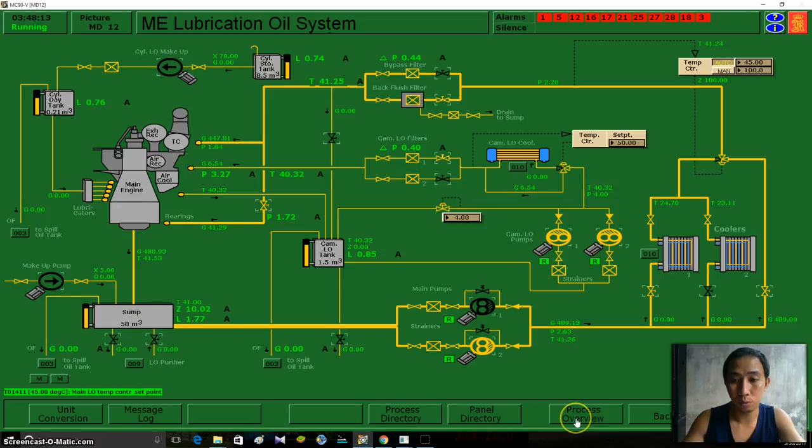So again, we'll be looking at our overview. Check, okay, everything is okay, everything's fine. We're going to look at our freshwater system. Okay, we have our bunker tanks here, lube oil purifier, we have a purifier for our fuel, we have our settling tanks, stern tube here. Bilge well, we can put it in automatic, no problem.

Okay, so we're going to look first at our freshwater cooling system. So we have our temperature, which is low. Okay, so no problem for that.

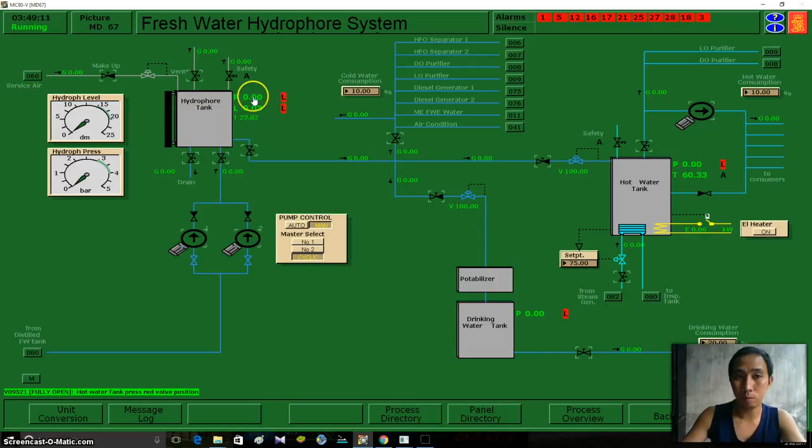Again, freshwater - okay, we're going to fill our hydrophore tank. But before that, to make the process faster, we're going to our bunker tanks. We're going to have our fuel in our port and starboard tank. So we're going to fill it up from here, connect the flange, then open the filling line. We need to close this line because this goes to our settling tank.

So I close this one because this was left open before. Also this one, and this is running. So we're going to set our temperature for our bunker tank, first at 40 degrees.

Okay, so as we can see, the gauge here, this is the flow. So we have our flow coming from our steam generator. Okay, so while filling up the tank, just don't forget that you're filling it.

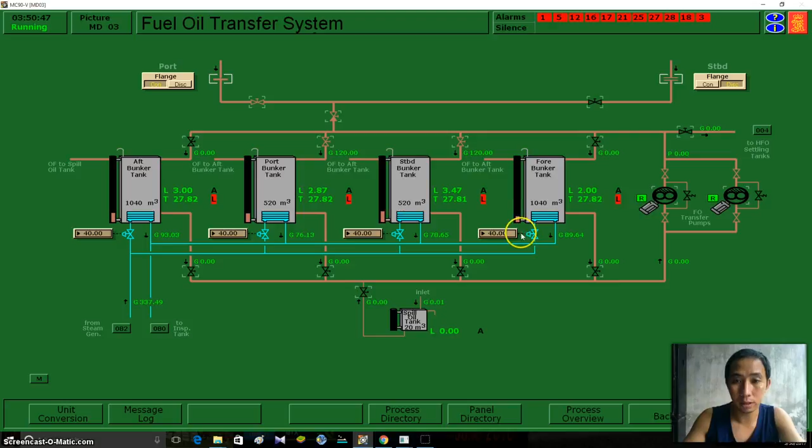We're going again to the process. We're going to our settling tank and check. Okay, so the temperature - the set point is 65. We'll just be waiting, and again, we'll look at the other system.

For our stern tube here, so the only alarm that we have is our low level. So we're going to fill that up.

So we're going to fill the first gravity tank from our lube oil sump tank by starting this pump. This is the low, this is the high gravity tank. While doing that, we can fill up our lube oil sump tank with our stern tube makeup pump.

Again, don't forget that you're having a bunkering. You're transferring fuel from the bunker going to your storage tanks.

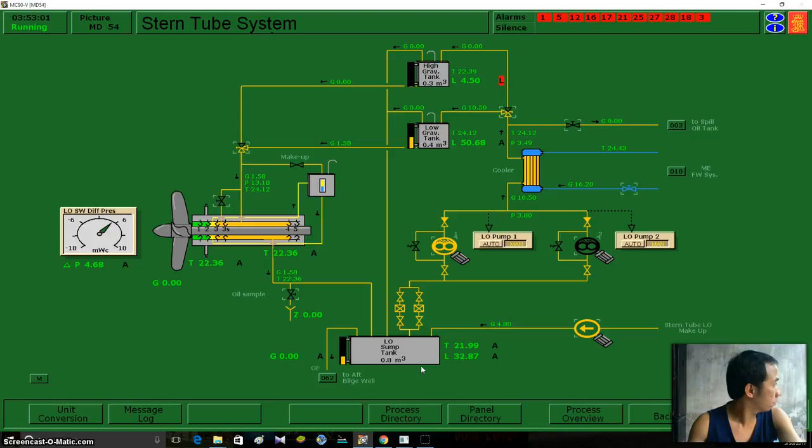I think this is enough. Switch to the other tank, the high gravity tank.

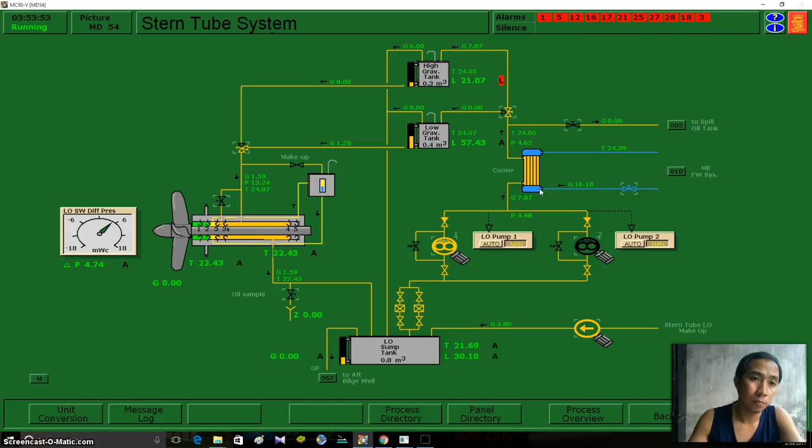It's okay, that is low level alarm. That's because we're transferring lube oil going to our gravity tank. So just acknowledge it by pressing F12.

And I think that's enough. Let's put it back to low. Ah, this is enough. Next one, okay.

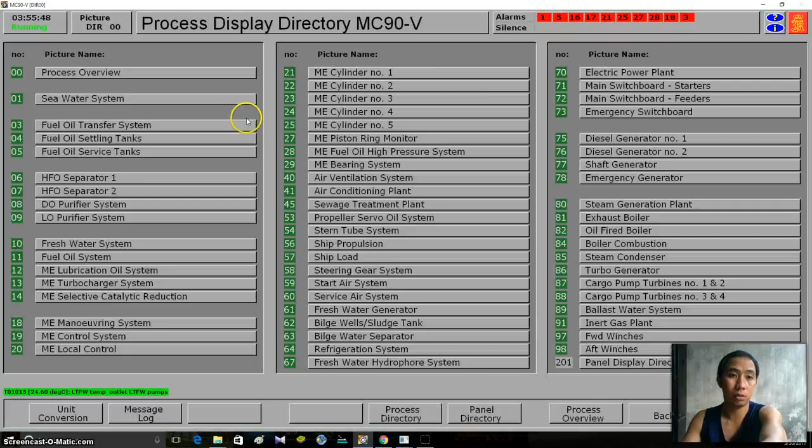We're going to our pump controller, camshaft, auto, freshwater pump - set it to auto. We'll switch this off and we're going to put it back to automatic.

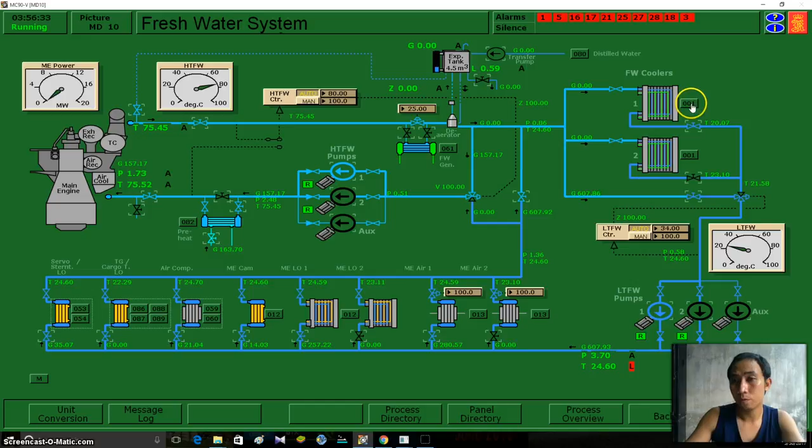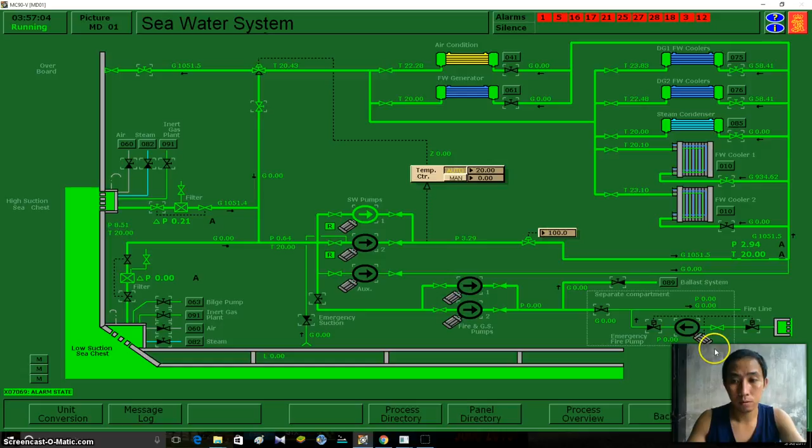Next alarm, tank level for low gravity tank. We're going to check that one. So our low gravity tank, we're going to fill that one up.

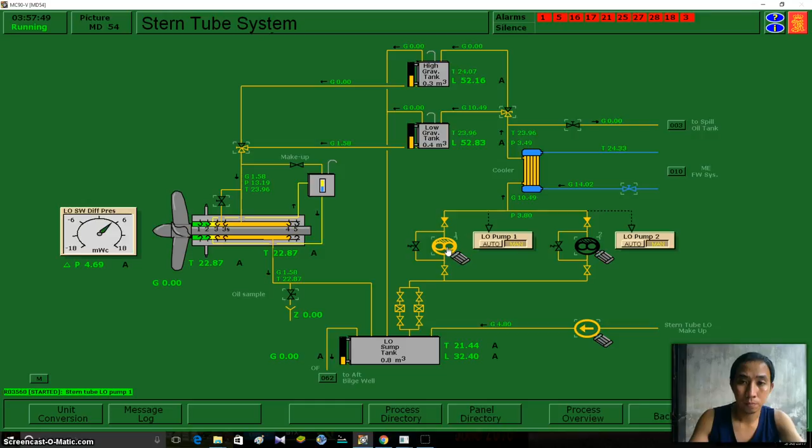Okay, so we're going to fill our freshwater system. It's because we're going to start our purifier.

Okay, to purify our fuel for service, since we're going to switch over from diesel oil going to our fuel oil. So our settling tank is here, service tank is here, temperature is ready and up. So we're going to service, going to the boiler, and going to our fuel oil system.

Okay, so this is our service tank. First, we're going to switch it to our boiler. We're going to change over from diesel oil going to fuel oil.

So we're going to do it. We're going to start our circulation pump, and we're going to start our heating. I'm going to look at here and wait until it reaches about 95 to 98 degrees.

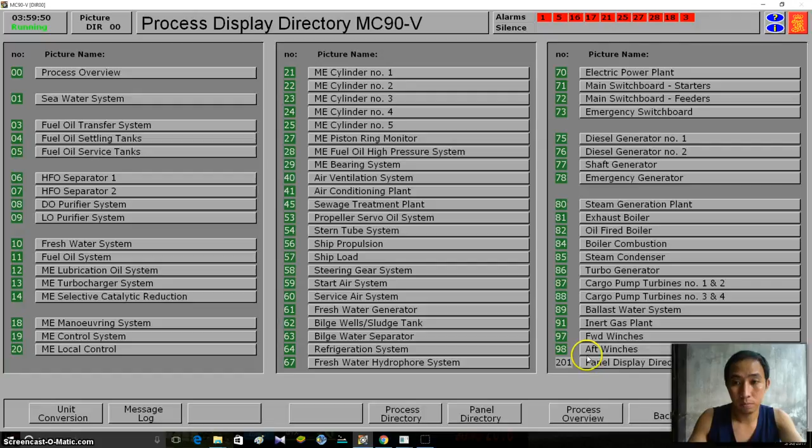While we're waiting for the temperature, we will go to our fuel system for our diesel generator.

Okay, so this is our fuel system. We'll make this ready. Okay, first we're going to start a pump. And we're going to set it in remote.

Okay, so this is flowing. From here, it will go here, open one of the fuel heaters, going to our backflush filter, going to our diesel generator, and going to our return to our service tank.

Okay, so we're going to start one circulation pump. Low viscosity. Okay, so...

Low gravity tank level again - never mind. We're going to switch on our heating to control our viscosity.

We're going to heat our lines. We'll switch our viscosity controller on and our visco motor on.

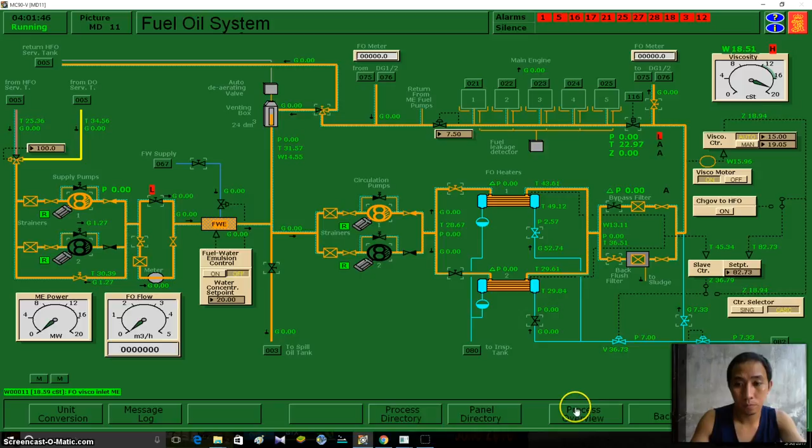Okay, you can see here. And we are ready to switch this.

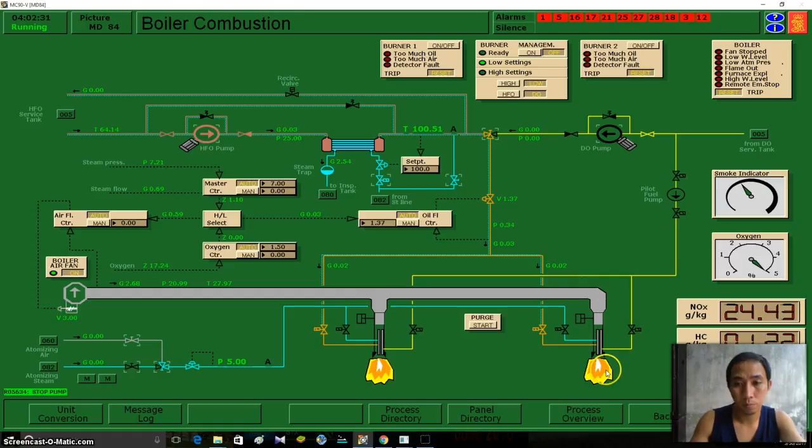Let's put this one to heavy fuel. Switch. HFO pump controller.